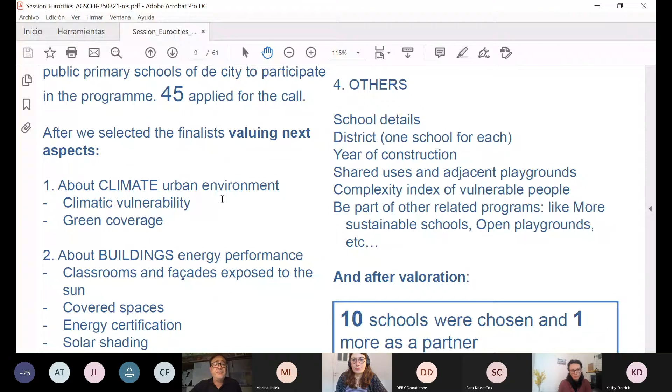For the school selection criteria, first of all we made an open call for all the public primary schools of the city to participate. 45 applied for the call. After that we selected the finalists, evaluating aspects about climate, urban environment, climatic vulnerability, percent green coverage, aspects of the buildings.

We looked at playground dimensions, sun exposure, water points, and other school details - districts of the city, with 10 districts of Barcelona and 1 school per district, year of construction of the school, shared uses and adjacent playgrounds, complexity index of vulnerable people, and interestingly, whether they were part of other related programs like more sustainable schools, open playgrounds, and municipality programs.

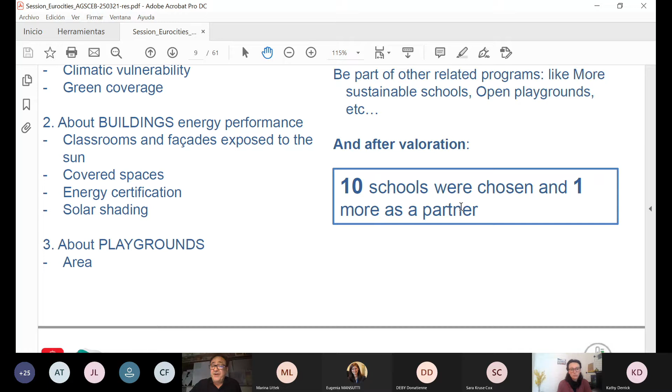After the evaluation, 10 schools were chosen and 1 more as a partner, making 11 schools total.

Another important point is the relation of the project partners: Barcelona City Council and municipal entities, the area of urban ecology more related to the green line, the area of social rights for vulnerable people, the Public Health Agency of Barcelona for health and the water cycle - the blue line - and the Barcelona Energy Agency. All these entities, along with Barcelona Education Consortium and ISGlobal for Research and UAB, are working together to develop this project.

It's very important work, coordinating with the different partners.

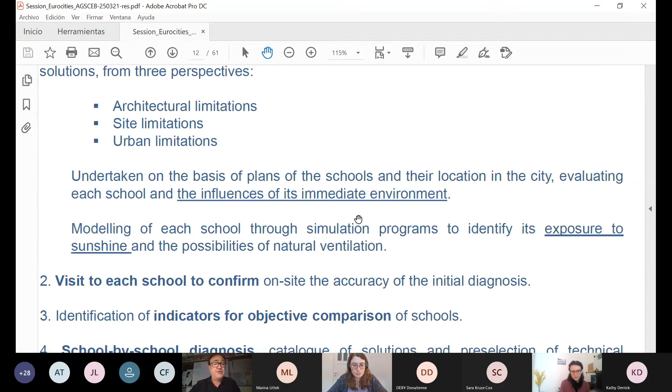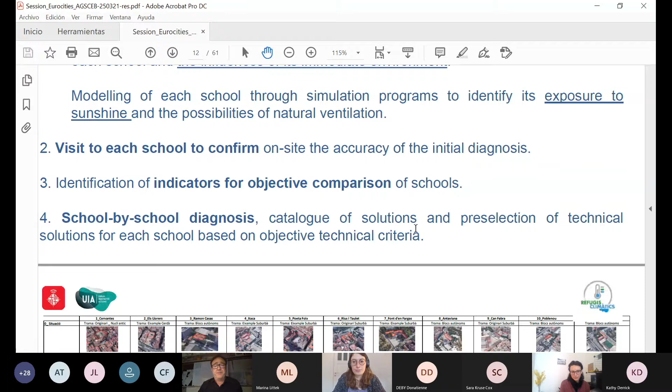Prior diagnosis - I'll speak quickly - it's important to have physical and technical information before the participatory process, so the whole community has real information before studying the new proposals, to go in the correct direction for the needs and proposals. Visiting the schools to confirm that initial diagnosis is very important, as is identification of indicators for comparative purposes in the school-by-school diagnostics.

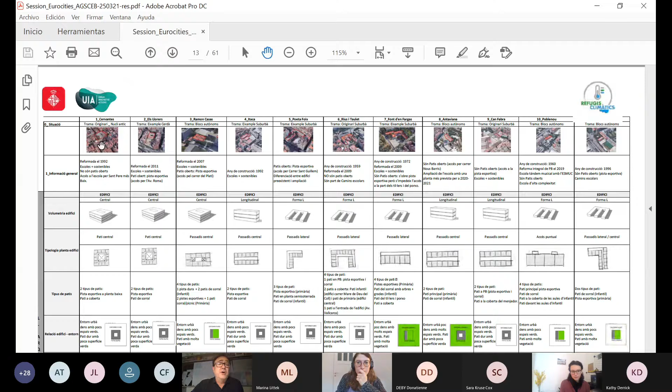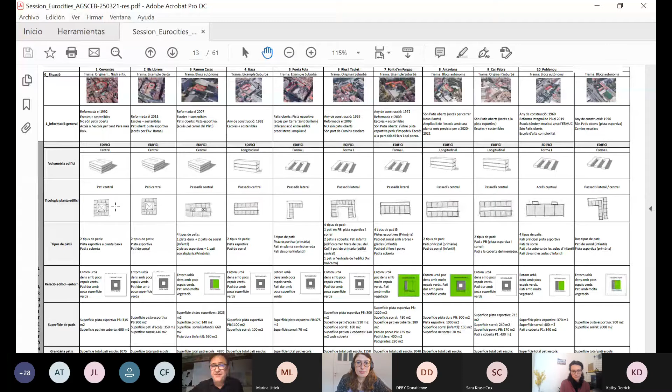And then we have this file, you see quickly, with the 11 schools listed at the top, and in the left column the physical and technical characteristics - the volume, the typology, surface, playgrounds.

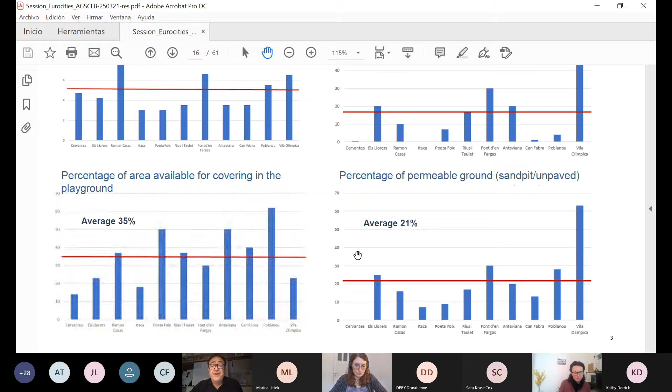With this information, we have the first analysis and results about the size ratio study of the playground: percent of area available for covering, and percentage of permeable ground. You can see the average, and the position of each school respect to the average. That is a first approximation.

That helps discover the correct line to make the proposals. The participatory process is important, a co-creation method. We involve all the education community in the project, to help define measures and assess their impact, with the whole education community.

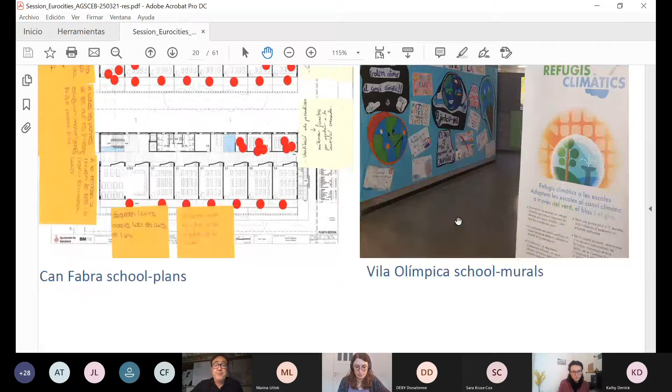This happened during 2 academic years, in 4 participatory sessions, each with teachers, pupils, and families before the second session. Each school had a way to explain the proposals with panels, pupils' explanations, maps, murals, and this is a summary of the improvements most prioritized by schools.

Solutions like natural cross ventilation, new vegetation, new pavement, fountains, and mixed solutions. This is the result of the participatory process.

The pedagogy process runs in parallel, more quickly, with the SHEN method: teacher training, climate change resources, scientific measures, and pedagogical support, with primary school pupils across 5 academic years and the whole education community, in 3 continuous training and support seminars during 2 academic years. This is the information provided for complete training.

And then there's a catalog of solution elements. In parallel with the rest of the work, we developed the catalog. The first classification had 20 element and solution families, 14 elements, and 6 mixed solutions.

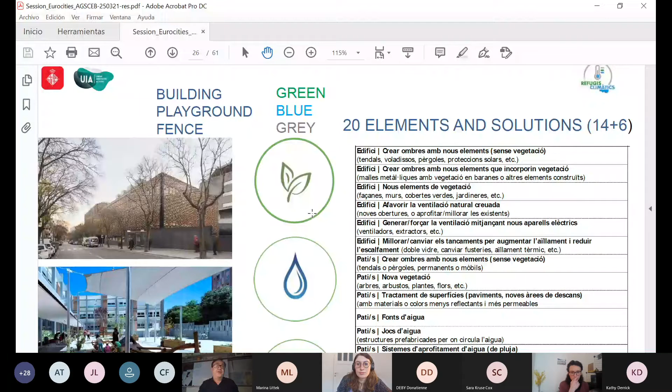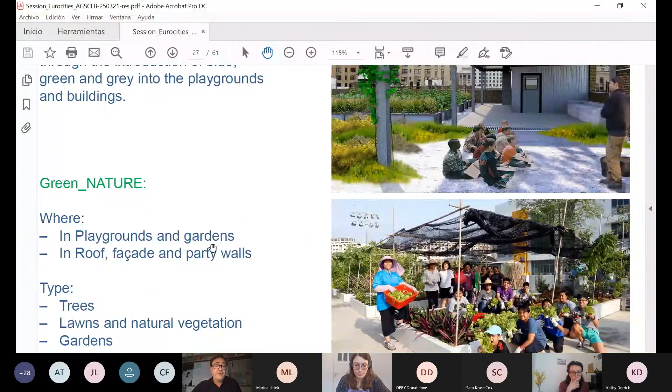Regarding the green, blue, and gray strategic lines, talking about the building, the playground, and the fence. Different strategies: green nature in the playground and gardens, on roofs, facades, and party walls. You can see types with trees, with vegetation, and with gardens.

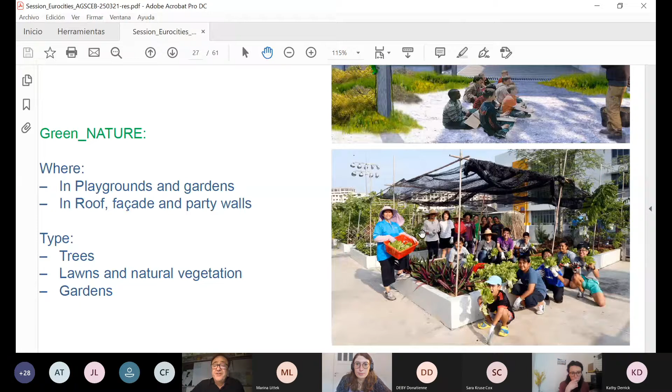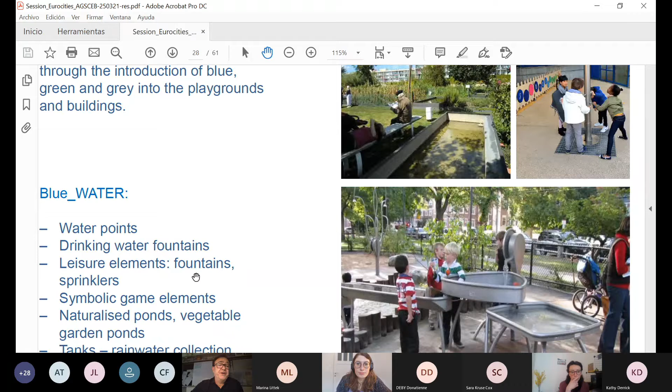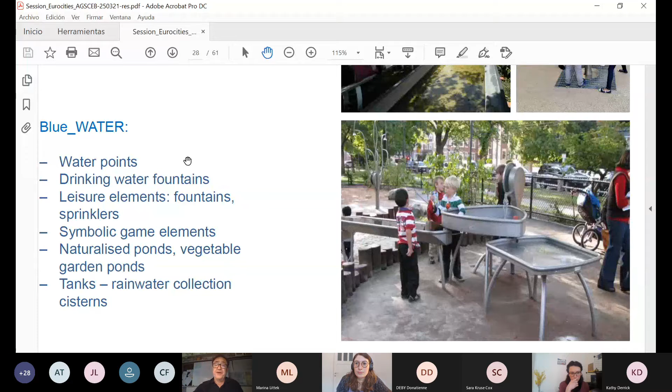With the blue line, water: we analyzed and proposed new water points, drinking water fountains, multifunction fountains, leisure elements, fountains, sprinklers, and symbolic game elements like flowing water, naturalized ponds, vegetable garden ponds, and rainwater collection tanks to provide water from rain.

And the gray line, the architecture line, buildings. The most important strategy is about energy production, like photovoltaic panels, an important line for Barcelona City Council and the Consortium, thermal solar panels, and mini wind turbines.

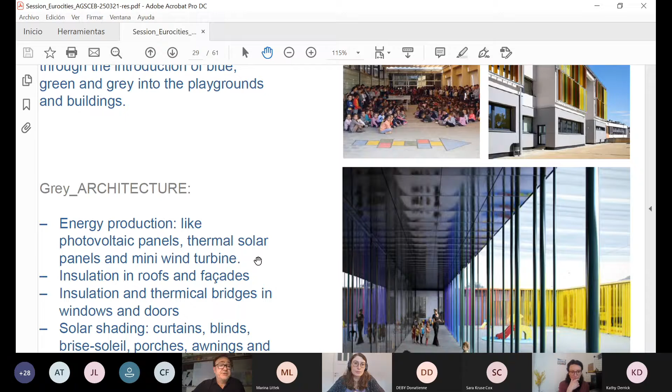Improving insulation in roofs and facades is also important, as is improving insulation of the thermal bridge in windows and doors: solar shading, curtains, blinds, brise-soleil, porches, awnings, pergolas, and cool roofs are also important.

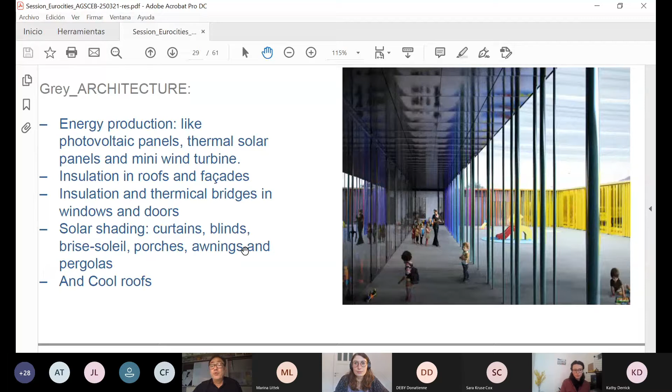And then we can organize the catalog with the lines better now, with 3 important aspects: playground elements for shade, treatment of the surface (gray line), elements of vegetation in the playground (green line), and water fountains, flowing water, systems to take advantage of the rain.

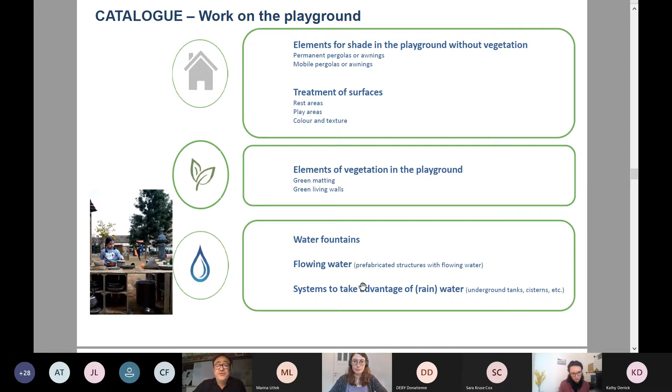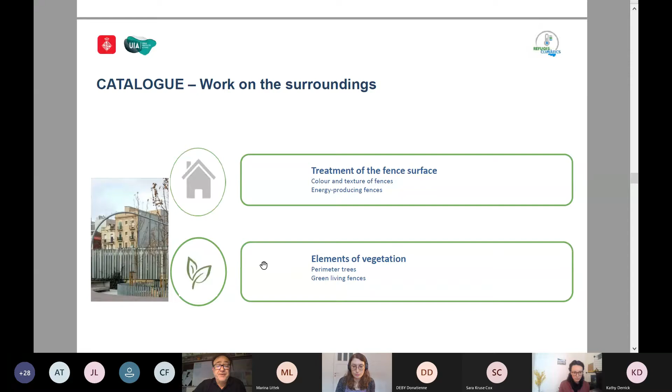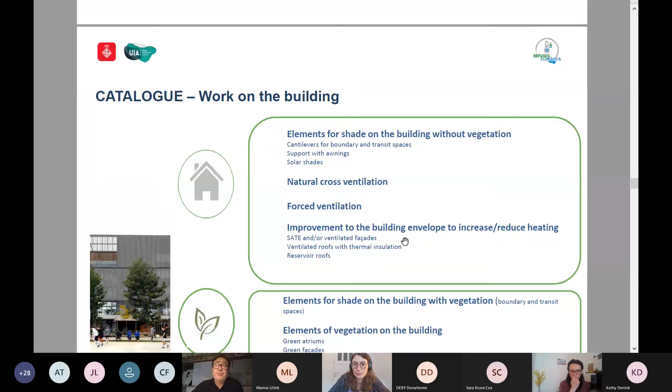Lines to work on the surroundings: treatment of the fence surface, elements of vegetation, classifying the 3 lines, green and gray, and work on the building and architecture: elements for shade on the building without vegetation, natural cross ventilation—very important in school buildings—forced ventilation, and improving the building envelope to increase or reduce heating, plus elements for shade with vegetation.

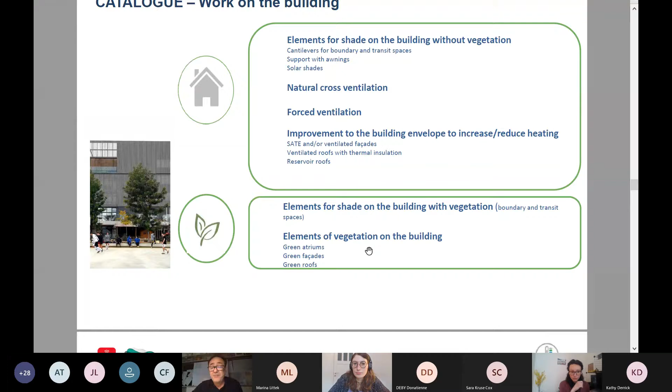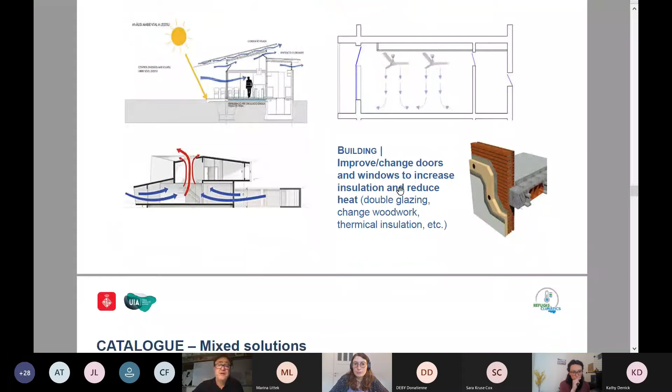This shows the detail of the element close up, a family of solutions: natural cross ventilation, the same as on the other slide, improving insulation, and mixed solutions of shade and vegetation, depending on each school's proposal.

Shade without vegetation, water, vegetation, shade, vegetation with water. And this is the document of the catalog, the current version. With this version we made a project.

We drove the project of the climate refuges. We are now working on another new version, more quick, with more information and better pictures—this is the very complete document used to work and carry out the participatory process.

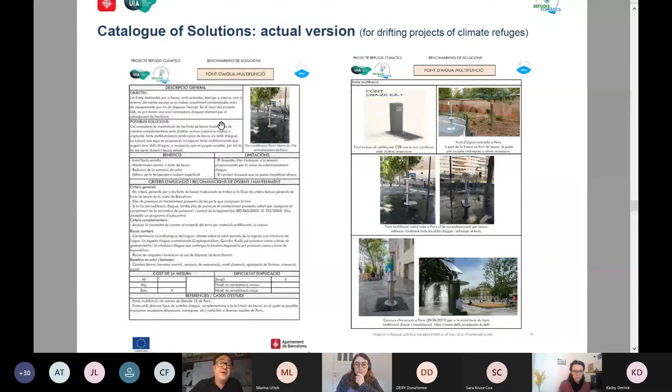Look at this family of elements, multifunction water fountains: the description, benefits, limitations, application criteria, recommendations, budget, and different models of this family, different elements within it.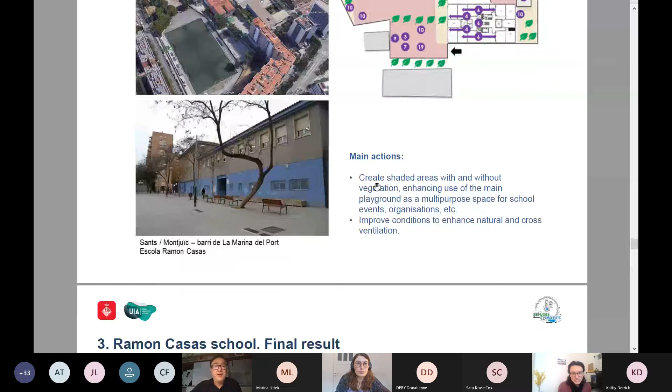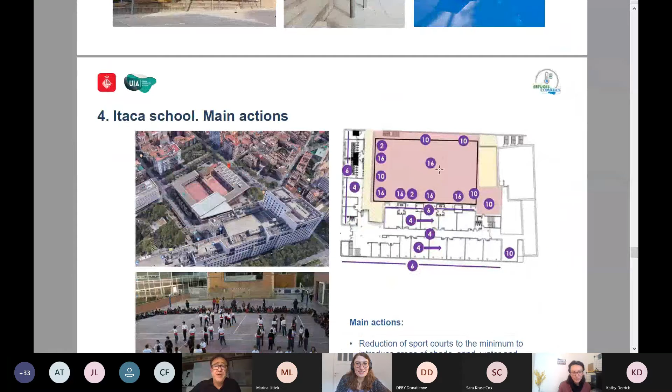Ramon Casas is the same. This is the final result. Always the same elements combined in different or mixed solutions, but I think they make very nice spaces of shelter.

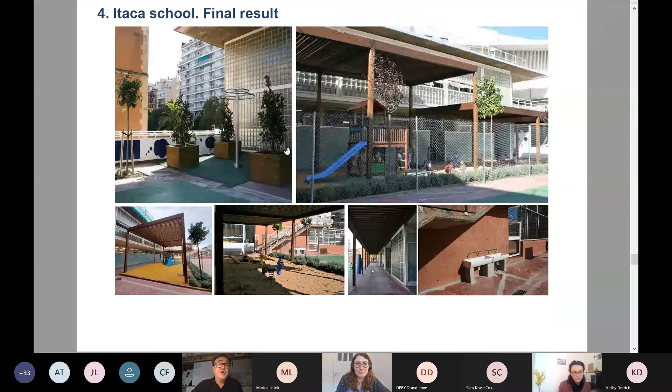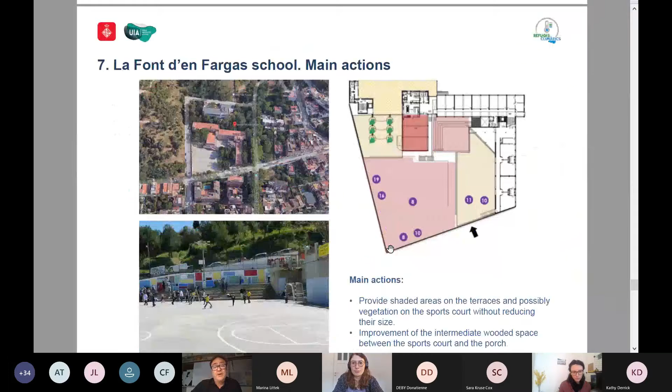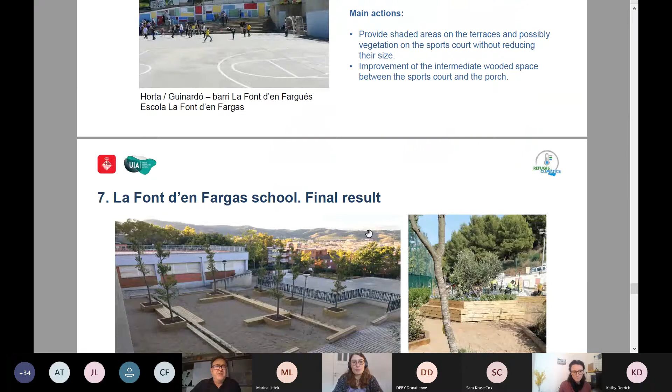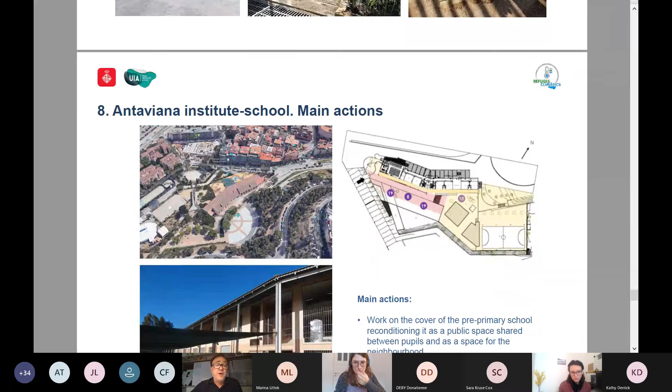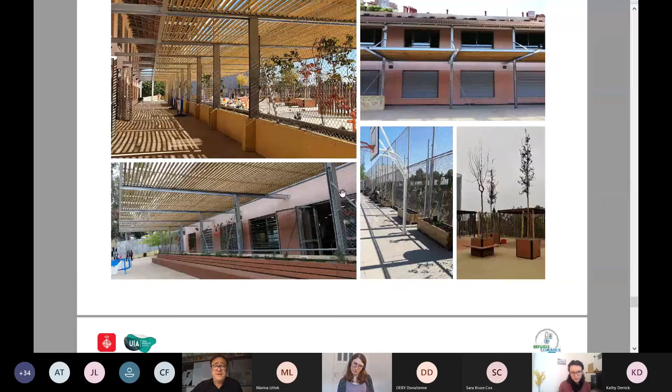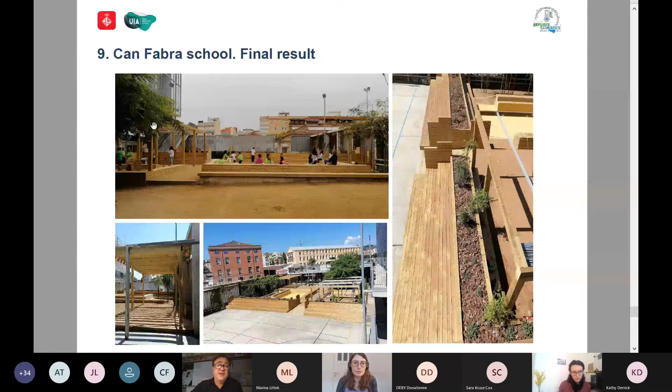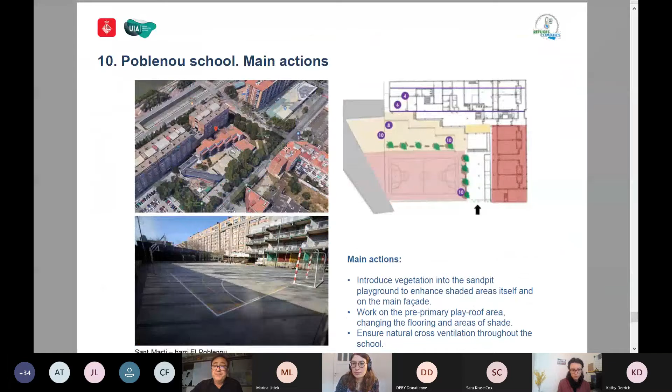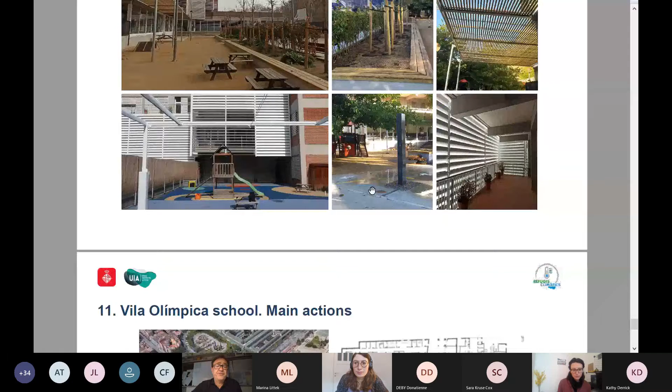That's another very nice solution, but they're always the same families: protection of the land, little gardens, space at the scale of the pupils, and more naturalized spaces in the city, with water, with protection from the sun and radiation, with many water points for drinking or washing.

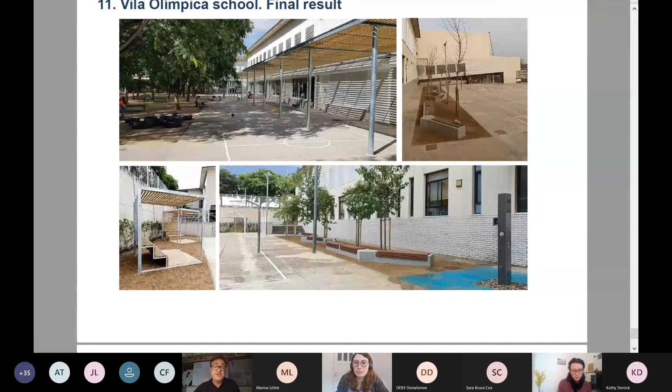For hot season you can see the Vila Olímpica, that's the partner, with special elements in all the elements in the catalog of solutions. Look like the multifunction water fountain. That is the little presentation; the complete document is in the header if you want to consult it fully.

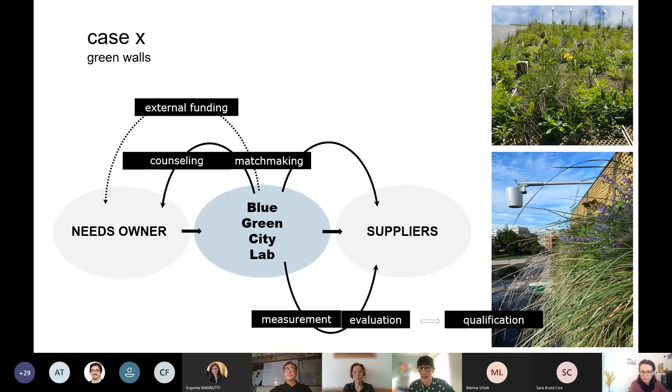And then the Blue-Green City Lab is measuring and evaluating these green walls. So that's one type of case. If we move on, we've got the next case.

Here instead, we've got a supplier that reaches out to us with a desire to have their product, basically one of the product components, evaluated independently, because often the suppliers have their own ways of testing their different components. But here, the Blue-Green City Lab can give them an independent evaluation of this. So they came to us for that, and through the counseling and discussions, we agreed on one kind of evaluation of this product.

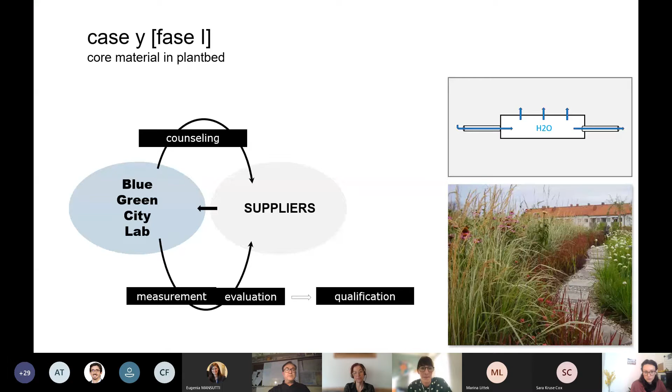But then we took it one step further. And here it's very interesting, because we've got the supplier that wants us to evaluate their product, but in discussions with the consortium or the different actors or organizations in the Blue-Green City Lab, the discussions led to us giving them information about the needs owners, what the municipalities want to see, what we need regarding climate change, urbanization, densification, what are the real needs. And of course, that is super valuable information for the suppliers.

So it ended up that we now have two cases with the same supplier. One is evaluating their product that they came to us for initially, and the other one is actually developing new products and innovation of products to meet the needs, basically. Yes, we move on.

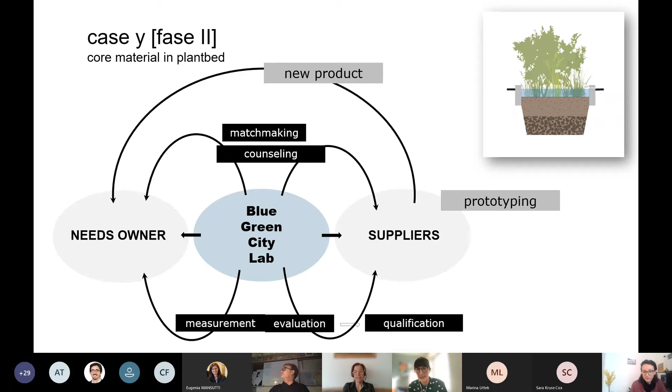This is also an example to show the width of what we're doing, how we work broadly with the aim to spread knowledge about the blue-green solution. That's a big part of the project, to spread knowledge.

Rain gardens, different types of build-ups for tree planting in cities and such. So we did that, and also to show the benefits, that there is a range of systems and the benefits.

This brochure is automatically sent out to everyone that applies for a building permit in Malmö municipality, just to give them a wee push, so you know this is a range of systems there are. But this is also a brochure that we can use in every contact and dialogue with needs owners or housing companies and such.

And then we also want to present something we've been working on as well. It's what we call a blue-green map jam.